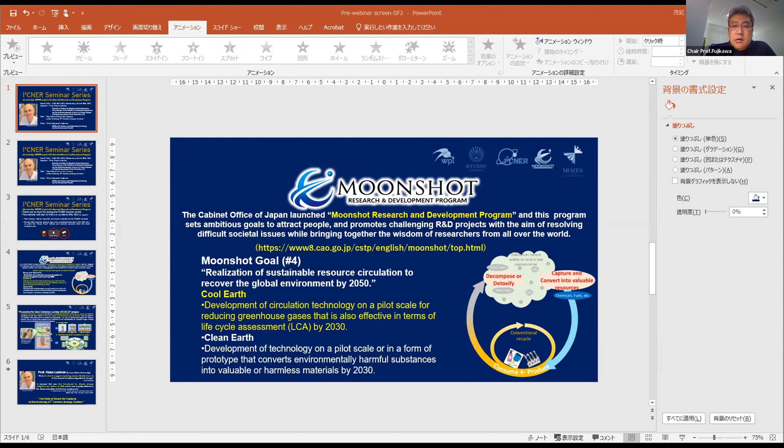So the reason why today we have this special seminar is that Kyushu University was awarded the Moonshot project. What is the Moonshot project? The Cabinet Office of Japan launched the Moonshot Research and Development Program, and this program set a very ambitious goal to attract people and promote challenging research and development projects with the aim of resolving difficult social issues while bringing together the wisdom of researchers from all over the world. So the Japanese government set 7 moonshot goals.

Among these goals, for moonshot goal number 4, the Japanese government set a target of the realization of sustainable resource circulation to recover the global environment by 2050. So we have 2 major keywords: cool earth and clean earth. Concerning cool earth, the Japanese government wants to develop circulation technology on a pilot scale for reducing greenhouse gas that is also effective in terms of life cycle assessment, LCA, by 2030.

So in this goal, direct air capture is a very essential and central keyword, because we have already emitted a large amount of CO2 into the atmosphere, and we have to manage this carbon capture and also circulate carbon in our society. So under this program, we proposed the so-called MOSES project, Moonshot for Zero Emission Society project.

Kyushu University is the representative institute, and in this project, an innovative membrane separation unit and an electrochemical or thermochemical CO2 conversion unit are integrated as one unit, as shown here. We named this system the direct air capture and utilization system, DACU system, which can process CO2 capture from the atmosphere to carbon fuel production continuously.

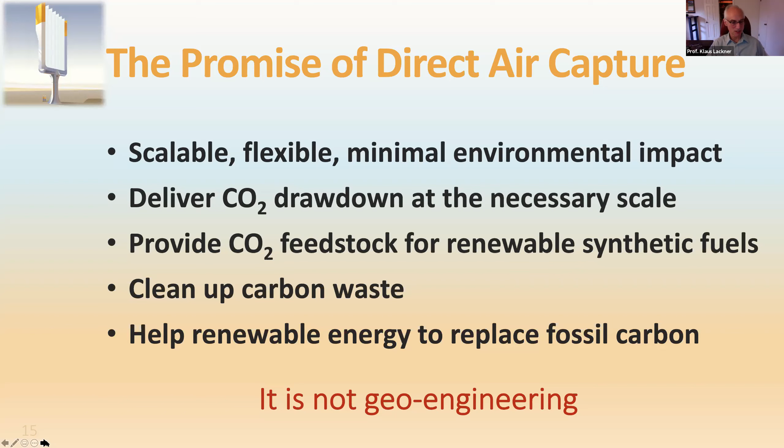And I would point out that I was chagrined from day one when people call it geoengineering. It's not. It's mining CO2 for useful purposes, closing the human carbon cycle, or for that matter, cleaning up our litter. But we are not geoengineering the planet when we do that. So there are questions whether it's even feasible. And the answer is, yes, it is.

The CO2 in the air is not too dilute. 1 cubic kilometer of air, and I make a comparison to wind here, passes through a big windmill in an afternoon. And if I value the kinetic energy at 5 cents a kilowatt hour at 6 meters a second wind speed, I have $300 worth of kinetic energy in that cubic kilometer of air. If I pay you a tipping fee of $30 to get rid of the CO2, that CO2 in that same cubic kilometer is worth $21,000.

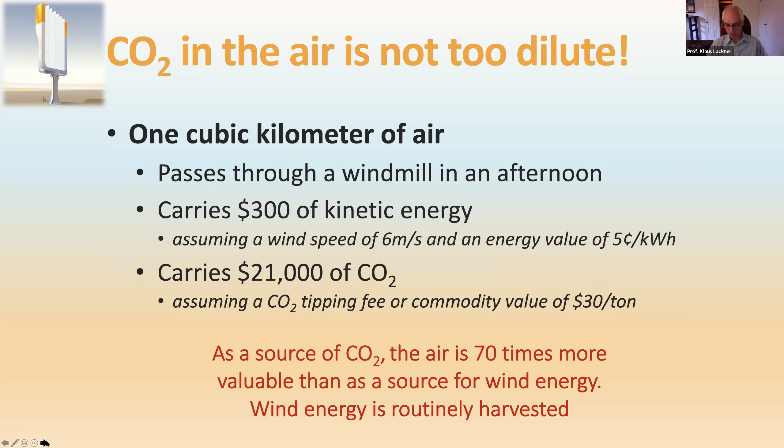So I would argue, as a source of CO2, the air is 70 times more valuable than as a source of wind energy. Yet we have learned how to harvest wind energy quite routinely, and we are very good at it. So now I would argue we have to learn to do the same here.

The area demand of air capture is actually quite small. It's 3 orders of magnitude smaller than biomass generation. That's why it works. We end up with 1 billion such trees. People want to solve the problem, but with natural trees they are talking about 1 trillion trees. It's 2 orders of magnitude smaller than wind installations, and 1 to 2 orders of magnitude smaller than solar installations.

And I would argue direct air capture at this point has no good substitute. People have asked me, are you sure it will work? And my answer is no, I'm not sure it will work. But I do know if it doesn't work, it's going to be painful because we do not have a good substitute for it.

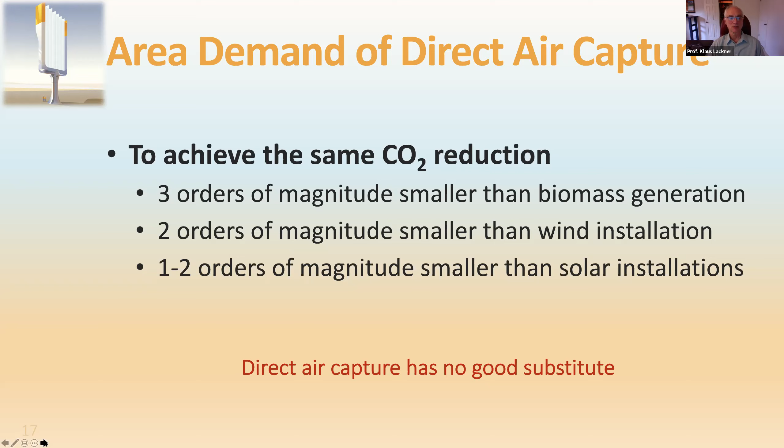So if we want to close the carbon cycle through the environment, we actually have options. We can go after the biosphere, and we collect the carbon via photosynthesis. We can do that. We can store bioenergy with CCS. We can do reforestation. We can produce biochar. It's affordable. It's a great start. We should do it, but it's ultimately limited in scale.

You would need more land than the world uses today for agriculture, while it has to feed more people than today, to make this work. So I think this will be a player, but it will be a small player.

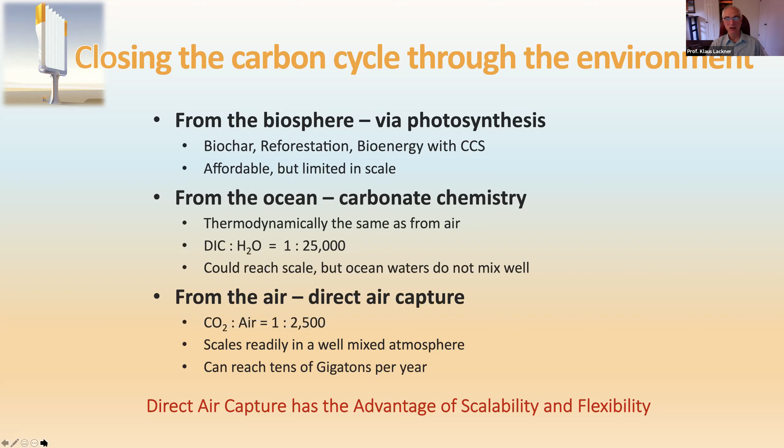From the ocean, you can do carbonate chemistry. Thermodynamically, that's identical to getting it from the air, because the ocean water and the air are in equilibrium. But in the water, there are 25,000 water molecules per carbon molecule, whereas in the air, it's 1 in 2,500. I actually think for that reason, air capture is easier than ocean capture, but if you have a good idea of how to do it from the ocean, I would argue it's a parallel, comparable approach to the problem.

So there are challenges though. What's the economic pull? The use of CO2 is too weak a pull. The unfortunate truth is a lump of coal is always cheaper than CO2 from air, and therefore it will only work if it's waste management as a service that requires regulation. And then, of course, it allows you to close the carbon cycle, because the alternative is that you pay for the waste disposal. You must make it necessary via regulations. Ultimately, the carbon price, which comes from regulations, must exceed the cost of air capture.

However, I would nearly turn this around. I would argue at the end of the day, the cost of air capture will set the cost of carbon. And of course, the lower, the better. But if you must collect, and you have a technology that's cheaper than air capture, it comes first, because you could do it at a power plant. If you don't have a good option, like an airplane, then air capture will be the option of choice. And if you have an option which is more expensive than air capture, why not use air capture?

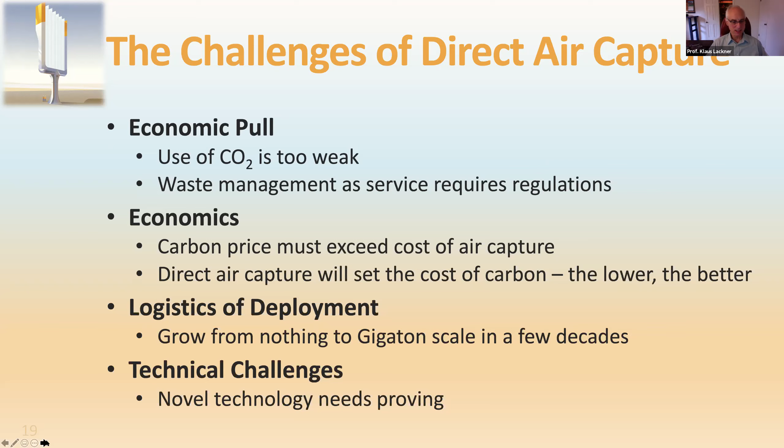The logistics of deployment are going to be absolutely formidable. You need to grow from nothing to gigatons in a few decades. And there are still technical challenges. This is new and innovative stuff, and it's far from clear. So people have actually said, is it really feasible? Right? And clearly 400 ppm poses a serious challenge.

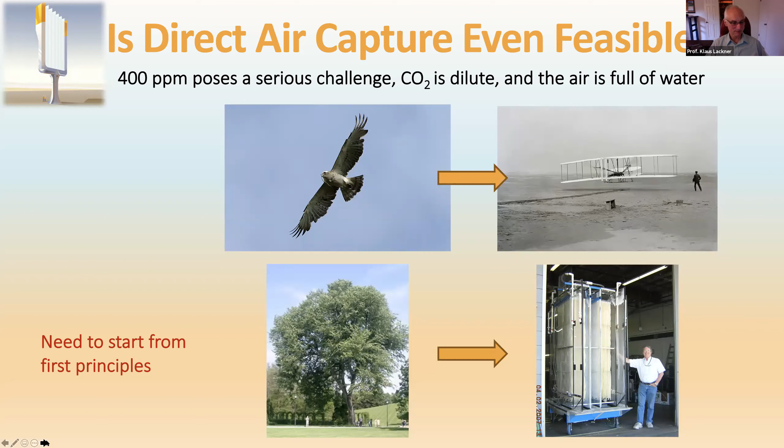CO2 is dilute and the air is full of water, but I couldn't resist these two pictures. You see a bird and you know that heavier-than-air flight is possible. You see a tree and you know that direct air capture is feasible. And this is a colleague of mine, and he stands in front of the first prototype in 2007, where we actually made it work.

In practice, all existing processes fall woefully short of this number. They need a lot more energy. But that tells you that we still have a lot to learn, because in the long run, good technologies gradually approach the thermodynamic limit. And if you're 20, 30 times off, you have a long way to go, and eventually you may find yourself 2 or 3 times off. And at that point, the cost of energy is not what limits you anymore.

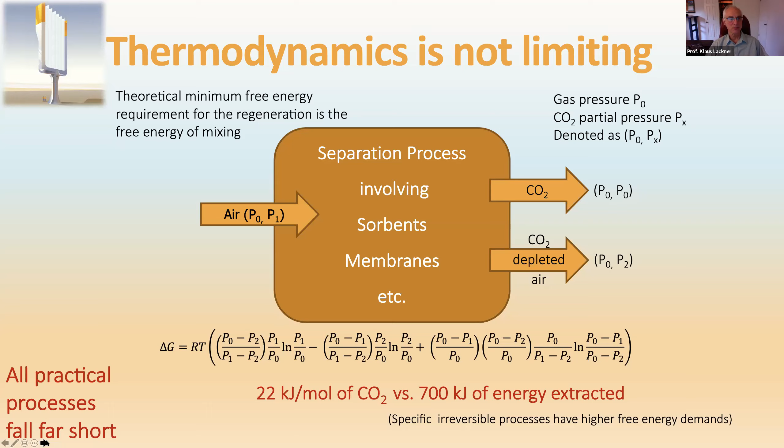People have argued Sherwood's rule, because Sherwood said that the cost of separation is linear in dilution, and we know what it costs in a power plant, therefore it's hopeless here. Sherwood's rule is correct, but it applies in a funny way, saying that if the first step of the cost dominates everything, then you are in trouble. And air capture is clearly too cheap.

But colleagues of yours in Japan have worked out that you can extract uranium from seawater at 3 parts per billion. And the trick was to be passive. Once you didn't pay for pumping the water, you could afford absorbing the uranium on a sorbent, a resin, by the way, and then destructively process the resin for its uranium content. And while the cost is still a little higher than mining uranium, it is actually quite close, and it's far from Sherwood's rule.

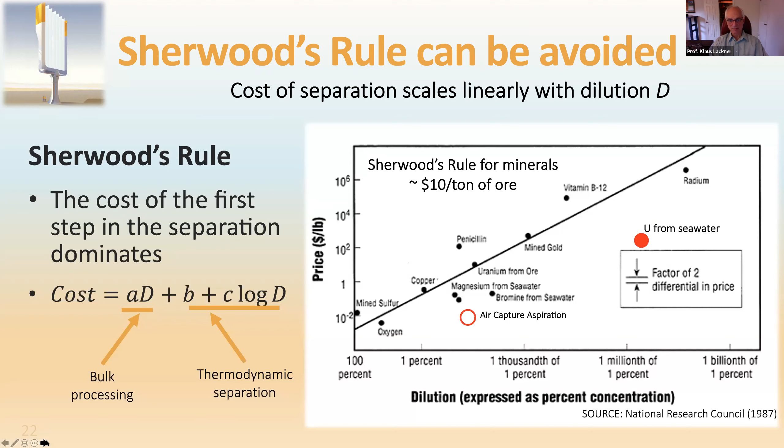Air capture, besides, is real. There are several startups who are working on it. You have heard about Carbon Engineering, Climeworks, Global Thermostat, and ASU is involved with a new startup called Silicon Kingdom Holdings. And our goal is to actually make this work. All of these have worked on designs. Ours is passive. The others are blowing the air around.

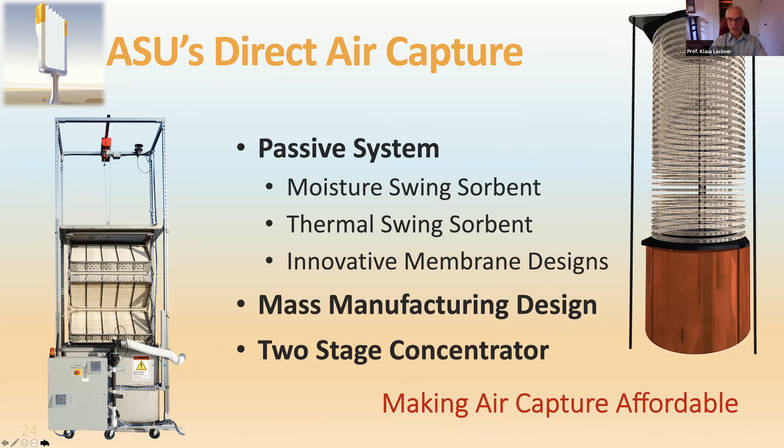Here is an early prototype. On the left, it's a picture of a device we had for nearly a year outside, and it actually collected CO2. On the right, you see an artist's rendition of the next version we are building. We right now have a concrete pad on campus where this year we are going to build that next system.

Our systems are passive. We use moisture swing to make it work. And we use a thermal swing sorbent as another alternative, and we have some innovative membrane designs we are pursuing. We are aiming for a mass manufacturing design and a 2-stage concentrator where we first go from 0.04% to 4 or 5% and then jump all the way to pressurized CO2. Our goal is to make direct air capture affordable.

The moisture swing is an interesting thing we discovered somewhat serendipitously. Certain ion exchange resins, strong-base ion exchange resins, have the feature that when they are dry, they love CO2, and when they are wet, they don't have any affinity to it. And we discovered this when we put these anion exchange resins into their hydroxide form. They loaded up to become bicarbonate, and if you made them wet, they fall back to the carbonate.

The partial pressure in equilibrium over the resin literally increases 500-fold as the relative humidity goes from 25% to 100%. We can characterize, therefore, the free energy of binding as a function of the relative humidity, and you notice it changes on the order of 12 kilojoules. So this is the difference between having 4 or 5% CO2 over the system or 0.04%. We can use water, moisture, to drive CO2 off the system.

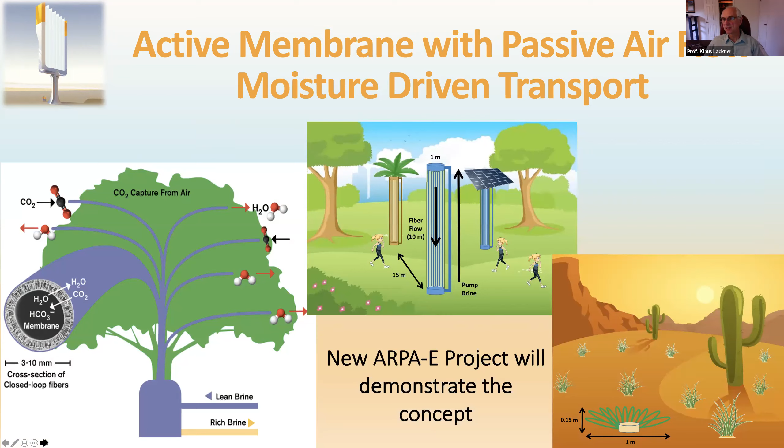There are plenty of challenges for air capture. It's a novel technology. Lots of things still need proving. We did some techno-economic assessments. One of my former students, Habib Azarabadi, pointed out we need about 100,000 cycles in the life of a sorbent in order to make it economic. We need to be able to clean off SO2 and other sour gases, which we will pick up from the atmosphere. And of course, we need to manage water. So there are lots of opportunities for new research, great new ideas of what to think about.

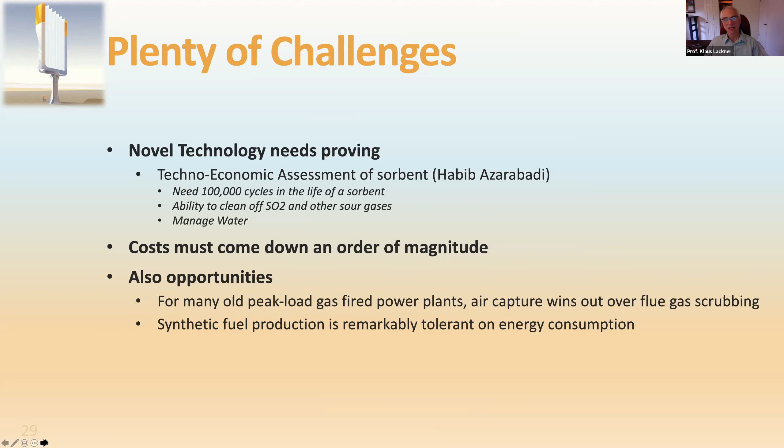And maybe we can also deal with power plants, because if you have a peaker plant, you can't afford putting things on there. The other challenge is, of course, you build a new industry from scratch. The cost has to come down, right? Supply and demand will set prices, and you have a large buildup in a decade or two. The climate change will drive demand at high prices.

Deep penetration of renewables requires, however, a very low price for direct air capture. I mean, the high price of CCS, in my view, will likely drive renewables forward. And we should couple those two things, have renewables, or for that matter, nuclear energy, work with direct air capture and make this work. And I would argue the need for drawdown, the need for negative emissions, will keep the price of carbon storage high, because you have a built-in demand which will not go away.

How do we get to low cost? Well, when we started, people said $600 is the floor. Early implementations now claim something like $200-300. Carbon Engineering claims they can get all the way down to below 100. I would argue practical interest starts at $100 a ton, because above that, I think it's too expensive, except as an

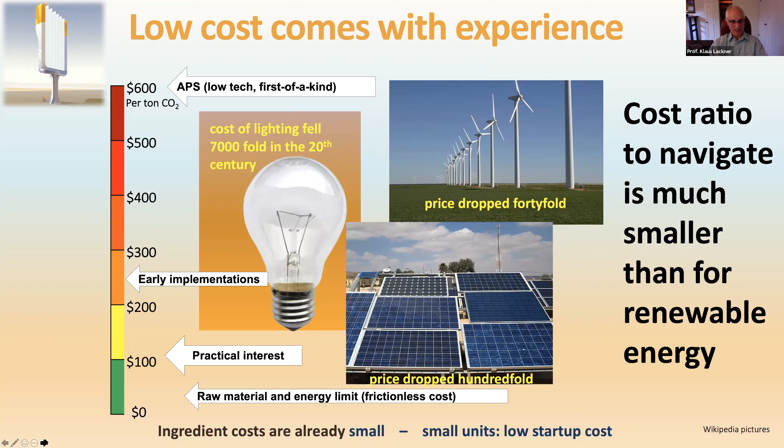emergency means. On the other hand, you can look at our work, and you'll find that the raw materials and inputs we need, sort of the frictionless cost, if everything could just be piled up, those raw and energy costs are somewhere between $10 and $20 a ton. At that level, everything else, in my view, can be learned away. And so I still see no reason why, once we reach gigatons, we couldn't be at $30 a ton, but of course I cannot prove that.

On the other hand, you see that photovoltaics has shown the way. Direct air capture is just entering the race, and the starting point for us is, of course, much better than for renewable power, right? Because we need to only get 10 times cheaper. The world is right now at $500 a ton, and at $100 a ton, we would be great, and at $50, we would be really good.

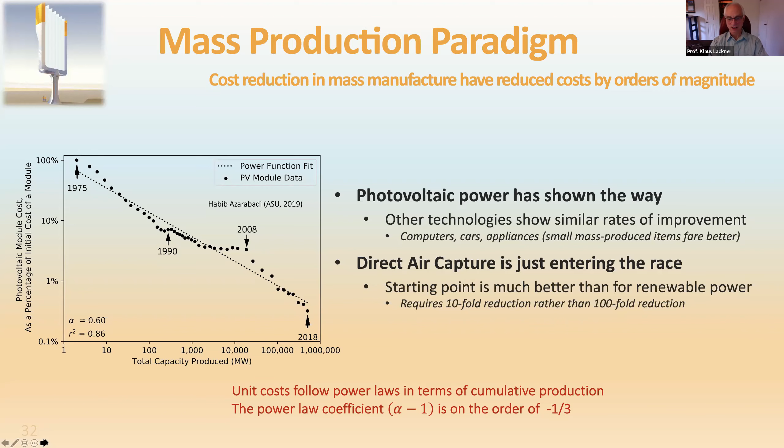Photovoltaics did succeed in gaining a factor 100, for which it had to grow 1,000,000-fold. So if you have the same kind of power law, and here I use this 1/3 law, air capture would have to grow roughly 1,000-fold. So from the kilotons per year to the megatons per year, whereas PV had to grow 1,000,000-fold to get from kilowatts to gigawatts before it was there.

We said, what if you hypothetically subsidize the excess cost and pay the producer as a subsidy anything above the target price of, let's say, $100? If you follow conventional learning curves, which is an if, you find that for roughly $50 million, that's the black curve in the middle, you actually would hit your target with 50% probability.

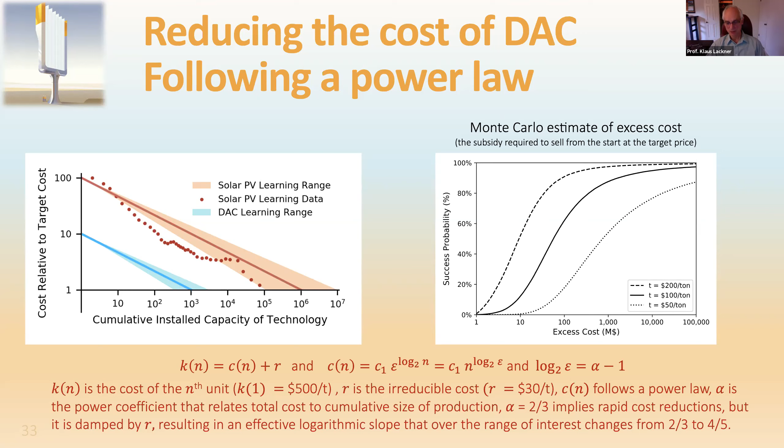Now, if you do the Monte Carlo and estimate how all these parameters could be log-normally distributed around that, you find that you have a long tail where you get to exceedingly high costs, which basically says learning models don't apply to this technology, which is a possibility. And in that case, you would know after a few billion that you clearly wasted your time and money, and you should not do this. But I think it is worth a few billion to figure out whether this technology is available.

And I think you need to set early cost targets. I think for raw energy from a PV panel, 1 cent per kilowatt hour is a nearby target. As a matter of fact, I'm arguing they're not far from there because people bid at 1.5 to 2 cents a kilowatt hour to get on the grid. If I remove the inverters, people tell me it's half of that price. So we are close to a cent a kilowatt hour. You need to be below $100 per ton of CO2.

Now, a penny a kilowatt hour at 50% efficiency would cost 80 cents to the gallon, or roughly 20 cents to the liter of gasoline, and CO2 at $100 would be comparable. The problem is your electrolyzer. At 10% utilization and $100 per kilowatt, that still adds 80 cents. And your current electrolyzers have a capital cost somewhere between $500 and $1,000 a kilowatt. So if you want to live with intermittent energy, you have to mass produce those as well and get the price down below $100 a kilowatt.

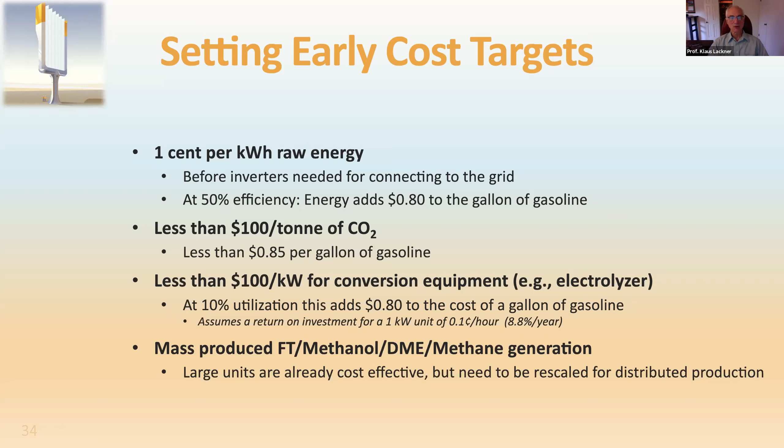But if you look at Fischer-Tropsch or methanol, we can do that, and it's cost effective at large scale. But if you deal with solar panels, you have to scale down. But if you look at and add up these costs, you come out at costs which certainly after taxes are smaller than current fuel prices. So I do believe we are getting close to being able to do that. So there's an enormous economic opportunity.

Carbon dioxide is always more expensive than fossil carbon, so you need the climate change perspective. And managing CO2 is a waste management challenge. And I think you need to introduce the concept of certificates of sequestration. And you need to demand that carbon coming out of the ground needs to be cleared by a certificate of sequestration. And if you do that, then markets can figure out the lowest cost option. I'd be willing to bet that that will include direct air capture, but the markets will figure this out.

And it introduces uses for excess carbon, and it supports the avoided cost of disposal. And renewable energy will drive us to zero waste. We use, recycle, and dispose 50 years of past emissions, because that's what it will take to stabilize the climate. Air capture then will set the price of carbon.

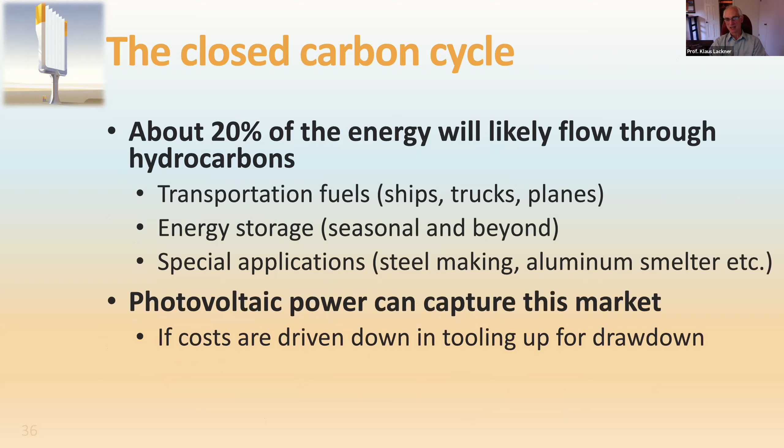And I would argue waste management of CO2 can become a $1 trillion business, which puts it in the same ballpark as automobiles or aviation, or a little smaller than the world energy systems. Then you can have a closed carbon cycle. About 20% of the energy will likely flow through hydrocarbons, and photovoltaic power can capture this market. And I think we enable photovoltaics or renewables in general to really deeply penetrate in the market, because we take the intermittency away.

You have to get from kilotons to gigatons at the end in order to be practical. The commercial markets are in the megatons. The US is consuming some 7 million tons of CO2 as merchant CO2 a year. That price is between $60 and $300 a ton. There's a large geographic difference. It depends how long the ride in the truck is. That gives you a foothold for a new technology at the megaton scale. Then you need regulations to get to the gigaton scale.

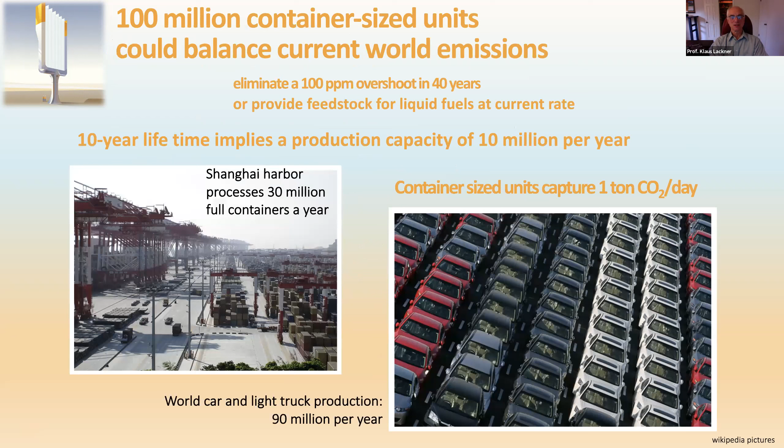Can you get there? 100 million container-sized units with each 1 ton a day would keep up with 40 gigatons, or 36 gigatons actually per year. If you have a 10-year lifetime, that means you need to build 10 million of them a year. Shanghai Harbor processes 30 million shipping containers a year. They are full. The world produces nearly 100 million cars and trucks a year. So that scale is doable, provided we give the right incentives to make it work.

Cell phones are similar. So I do believe that if we set our mind to it, create the right economic incentives, you can make this work on a 20-year time scale. But then don't forget, you have 40 years of pulling CO2 back before you have things under control. This is not a silver bullet. This is a hard slog to go.